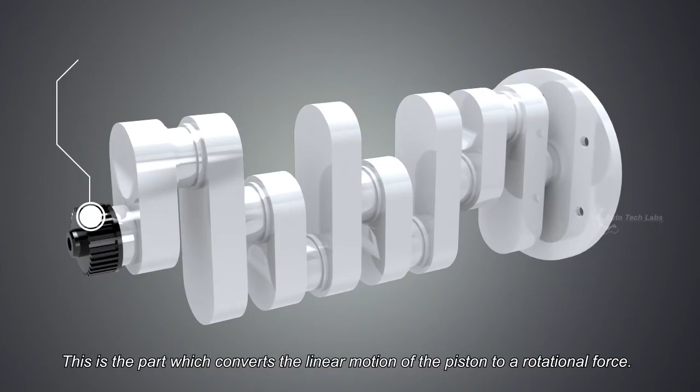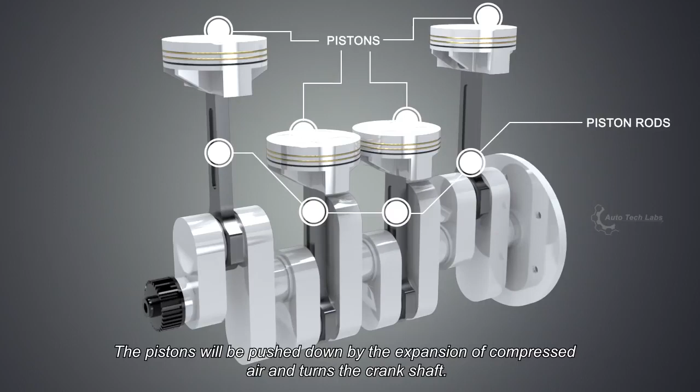First, the crankshaft. This is the part which converts the linear motion of the piston to a rotational force. Next, the pistons and the piston rods. The pistons will be pushed down by the expansion of compressed air, and turn the crankshaft. And the valves, which control the flow of air and fuel into the cylinders.

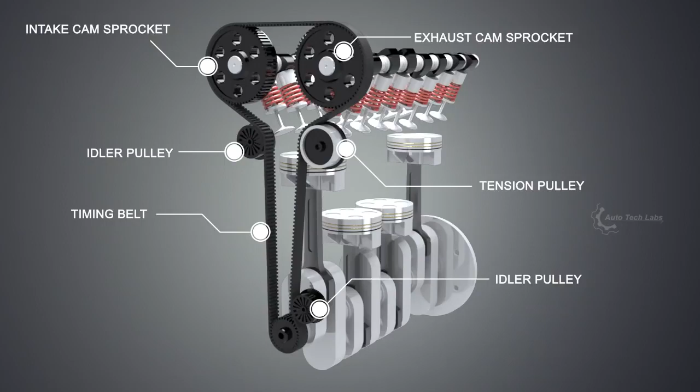These valves are driven by the intake camshaft and the exhaust camshaft, and the camshafts are driven by the crank itself, using a timing belt. There will be idler pulleys and a tension pulley to hold the belt tight in place.

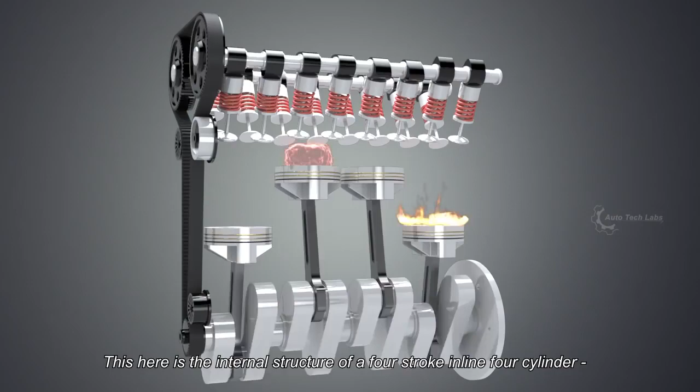This here is the internal structure of a 4-stroke, inline 4-cylinder, DOHC engine, which is commonly found in most hatchback and sedan cars. A 4-stroke engine should pass through 4 different strokes to complete one cycle to produce power. They are intake, compression, power, and exhaust stroke.

The crank-to-camshaft ratio is 2:1, which means it will take 2 crank revolutions to complete 1 camshaft revolution. And the camshafts are designed in a responsive manner, to open or close based on the corresponding strokes of each cylinder. Let's take a look at a single cylinder, and see how a 4-stroke engine works in detail.

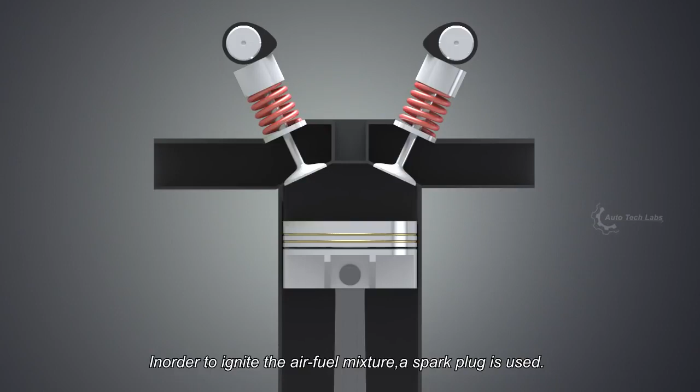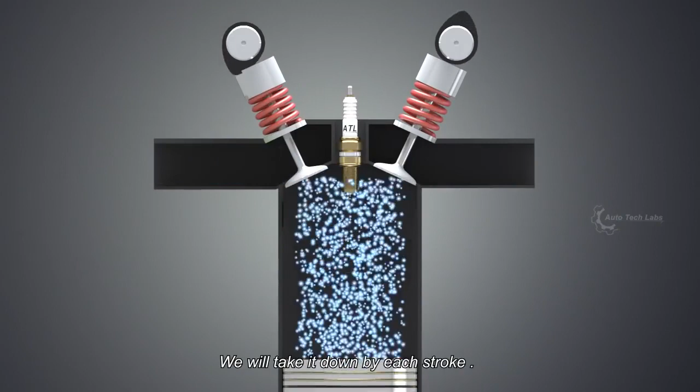In order to ignite the air-fuel mixture, a spark plug is used. This will ignite the compressed air-fuel mixture with the help of an electrical spark. We will take it down by each stroke. The intake stroke. The inlet valve opens and the downward movement of the piston creates a suction. This pulls the air-fuel mixture into the cylinder.

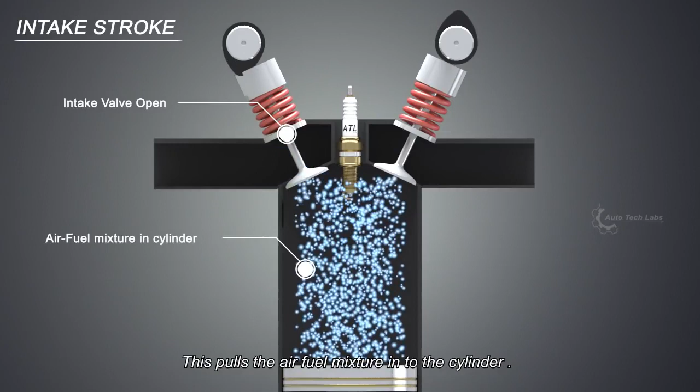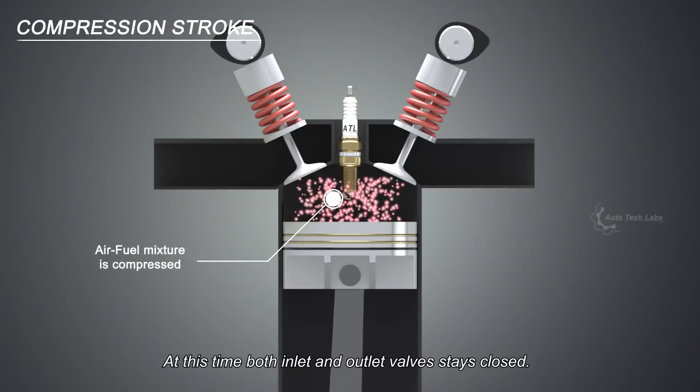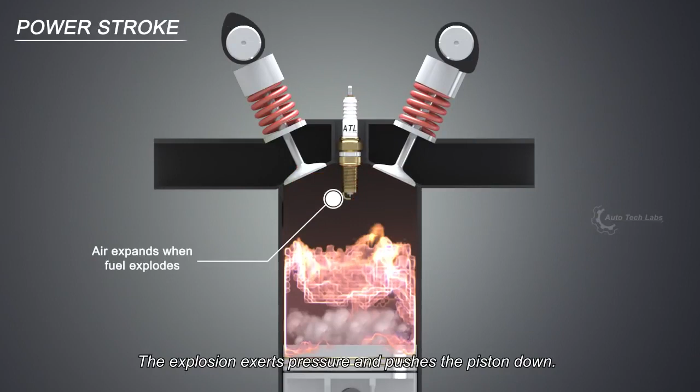Once the air-fuel mixture is in the cylinder, the compression stroke begins compressing the mixture. At this time both inlet and outlet valves stay closed. At the end of the compression stroke, the air-fuel mixture is ignited by the spark plug. The explosion exerts pressure and pushes the piston down. This is the power stroke, which produces power to the crank.

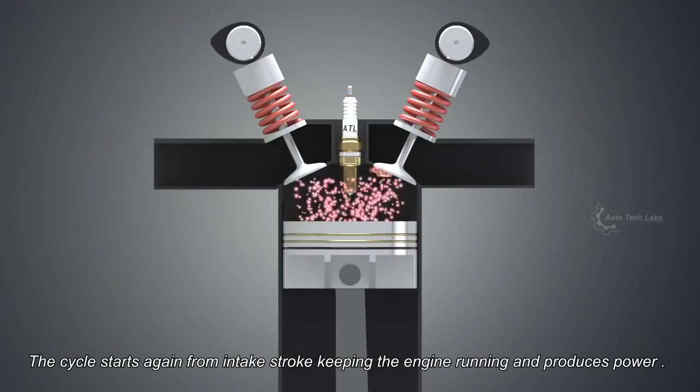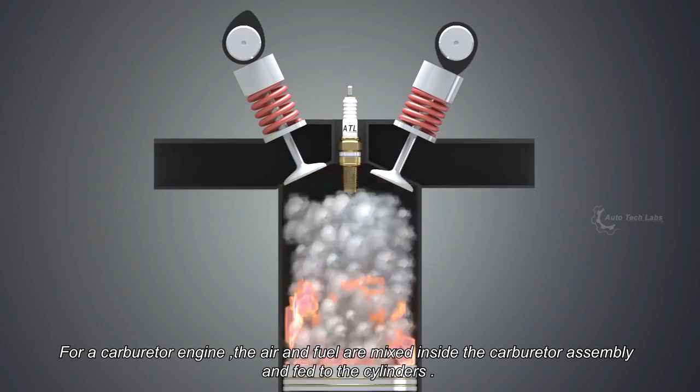At the exhaust stroke, the outlet valve opens and the piston pushes out the burned gas. The cycle starts again from the intake stroke, keeping the engine running and producing power. For a carburetor engine, the air and fuel are mixed inside the carburetor assembly and fed to the cylinders. In the case of a fuel-injected engine, the fuel is injected into the intake manifold, or directly into the cylinders.

Since only a power stroke produces power, you may wonder how the engine turns continuously. Well, the answer is in the crank itself. The flywheel and the crank counterweights provide momentum, which keeps the crankshaft from stopping immediately. For a 4-cylinder engine, at any time instance, one cylinder is always in power stroke, which produces more power and less vibration compared to a single-cylinder engine. And that is how a car engine produces power, in simple terms.